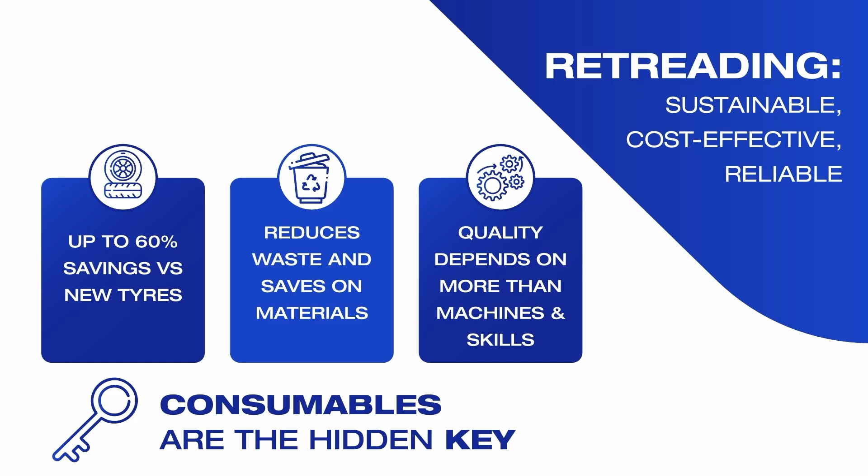The success of retreading doesn't only depend on machinery or skilled operators. It relies heavily on something often overlooked: the consumables. Consumables are the heart of the retreading process. They may seem like small everyday items in a factory, but in reality, they determine whether a retreaded tire will be safe, durable, and profitable, or whether it will fail prematurely.

These consumables include everything used from first inspection right through to final inspection. Each one has a specific function, from repairing damaged casings to ensuring perfect adhesion between old and new layers, to protecting the tire during curing. Without these consumables, the retreading process would be incomplete. More importantly, without quality consumables, the final product would not meet safety standards or customer expectations.

In the transport industry, where tires carry heavy loads over long distances, reliability is non-negotiable. That's why understanding the role of each consumable is vital. In the presentation, we'll explore the different consumables used in tire retreading, look at their specific roles in the process, and discuss why their quality and proper application is essential. By the end, you'll see that consumables are not just materials we use up. They are the building blocks of retreading success, ensuring that every kilometer driven on a retreaded tire is safe, efficient, and cost-effective.

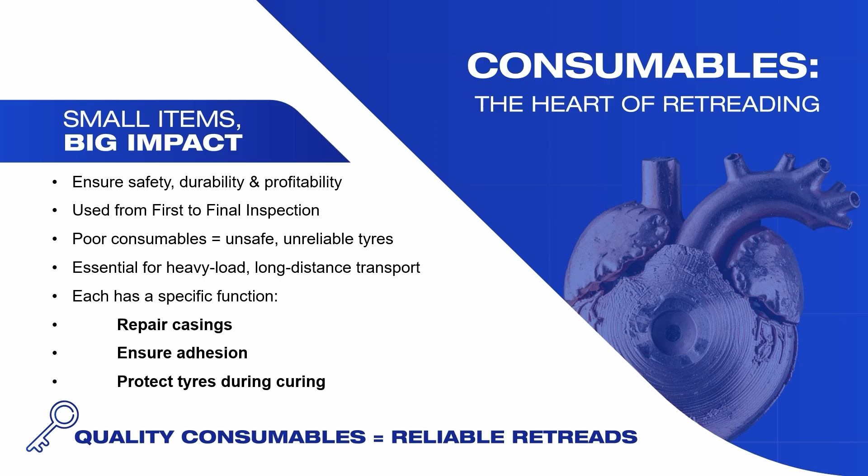What are the objectives of the consumables used in the tire retreading process? In the retreading process, consumables are the supporting materials used alongside the main rubber compounds to ensure the retread is durable, safe, and efficient. The objectives can be grouped as follows. Surface preparation: ensure the buffed casing is clean, rough, and free from contaminants. Examples: cleaning solutions, solvents, rasps, brushes. Bonding and adhesion: promote strong chemical and mechanical adhesion between the old casing and new tread rubber. Examples: cement, cushion gum, bonding gum, and adhesives.

Repair and reinforcement: restore damaged areas like injuries, nail holes, sidewall cuts, before applying the new tread. Examples: repair patches, patch cement. Sealing and protection: prevent air leaks and contamination during curing and after retread. Examples: envelope loop, wicking. Curing support: assist in uniform pressure, air removal, and correct heat distribution during vulcanization. Examples: envelopes, inner tubes, and curing tubes.

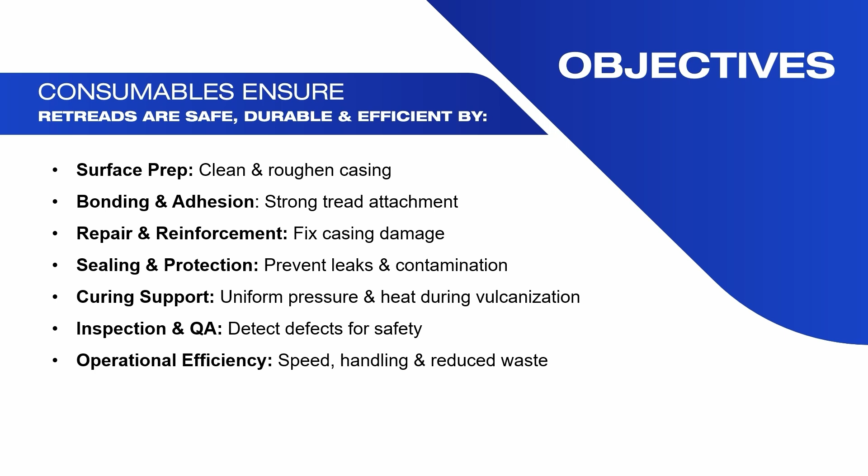Inspection and quality assurance: detect defects, separations, or trapped air to ensure safety of the finished tire. Examples: chalk, paints, sprays, and detector fluids. Operational efficiency: improve handling speed of production and reduce waste in the factory. Examples: lubricants, stitching tools, etc. In short, consumables in tire retreading exist to clean, repair, bond, seal, cure and protect the casing so that the retread performs like a new tire in safety and mileage.

Let's break down the consumables used in the different stages of tire retreading. Safety note: the operator must at all times wear protective clothing during each stage of the retreading process, available from Leadertread. Number 1: first inspection.

Tire probe: to probe at cuts, penetrations, and areas of localized damage. Pliers or pinchers: to remove penetrating objects such as nails, screws, bolts, sharp pieces of steel, etc. within the tread area. Also to remove existing loose repair patches or plugs.

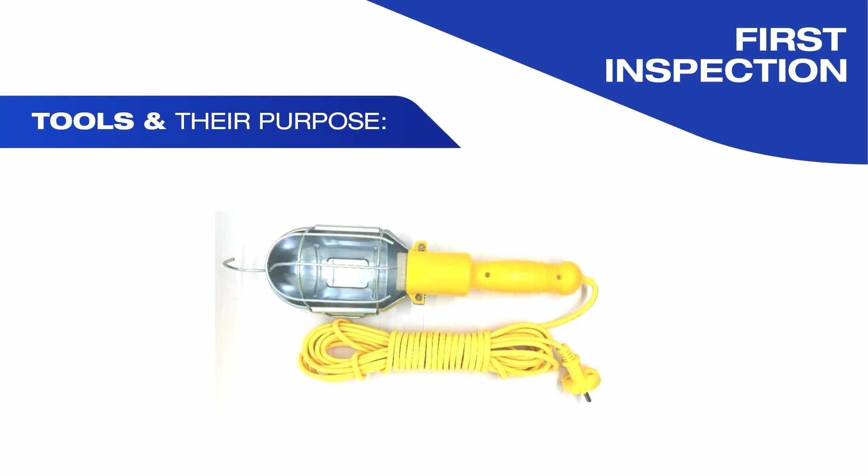Sharp knife: to cut away loose areas of damage or tread rubber to assist in damage assessment. Tape measure for injury measurement and repair assessment. Portable hand lamp to assist in the examination inside the casing or areas of shadow. Tire markers, marking the location and identification of injuries.

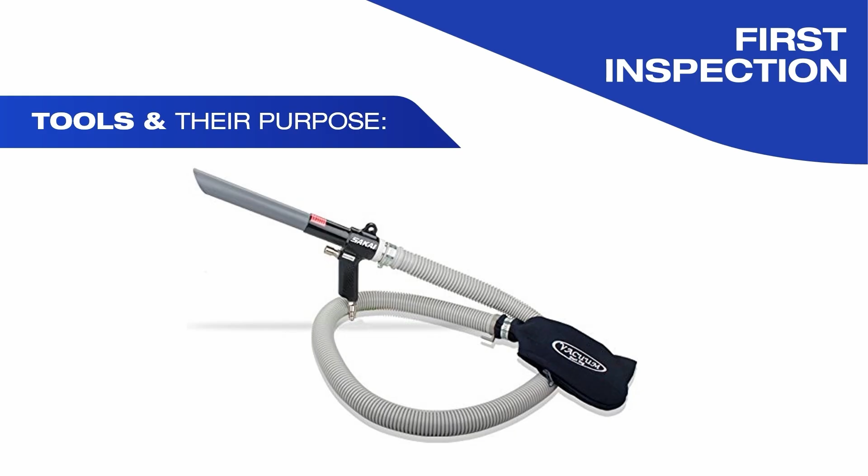Safety glasses for eye protection when removing penetrating objects, stones, glass, etc. Vacuum for the removal of debris from inside the casing. Scraper for the cleaning of the inner liner of the casing together with cleaning solution. Gloves and protective clothing to protect the operator while handling and sorting casings.

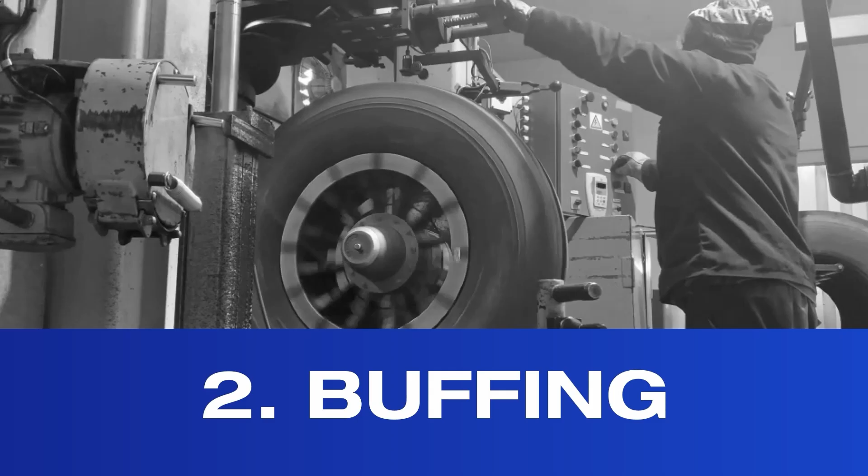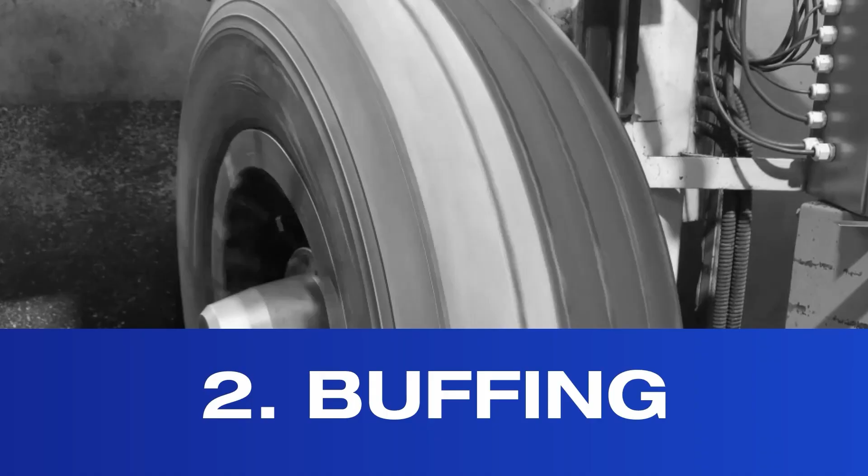Number 2: Buffing. Safety note: the operator must at all times wear safety glasses and ear protection whilst buffing. The primary purpose of the buffing operation is to remove the oxidized and the residual tread rubber from the original casing, and in doing so, to provide a suitable buffed profile and surface texture for the application of cushion gum and pre-cured tread prior to vulcanization.

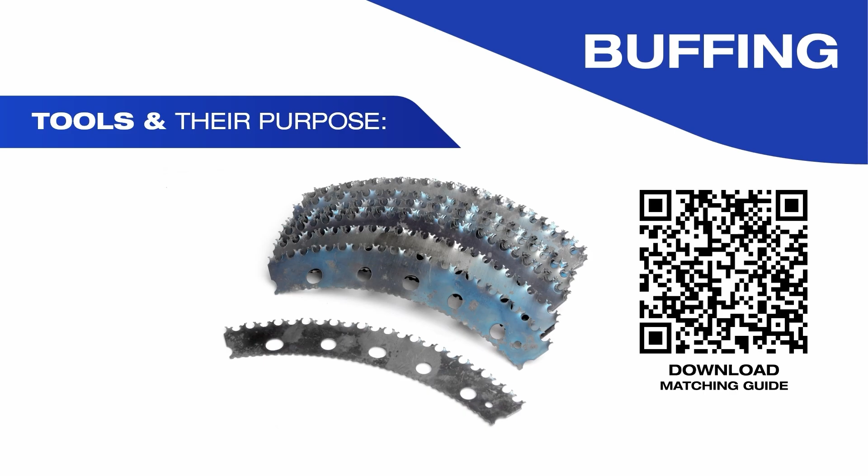Before commencing the buffing operation, the condition and sharpness of the rasp blades must be checked and verified in order to achieve optimum levels of buffed texture without scorching. Buffing blades: the primary purpose of the buffing blade in the rasp hub's operation is to remove the oxidized and residual tread rubber from the original casing, and in doing so to provide a suitable buffed profile and surface texture for the application of cushion gum and pre-cured tread prior to vulcanization.

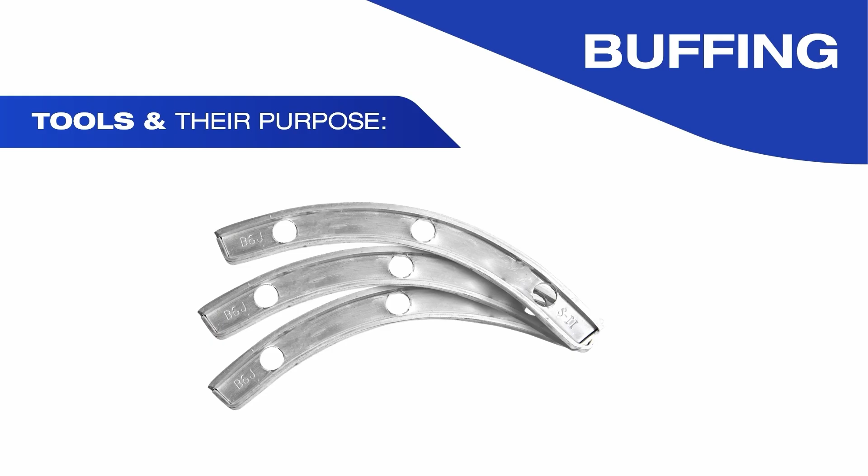Spacers: spacers are used in between the buffing blades in the rasp hub for spacing to get the required buffing texture and for air to flow through the rasp hub for cooling the blades. A file is used for sharpening of the buffing blades, to retain the required buffing texture. We will now show you a short video on how to optimize your buffing hub.

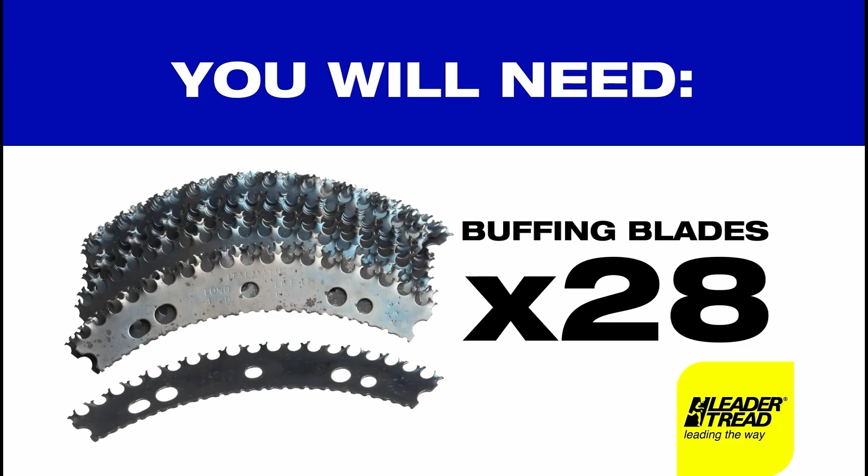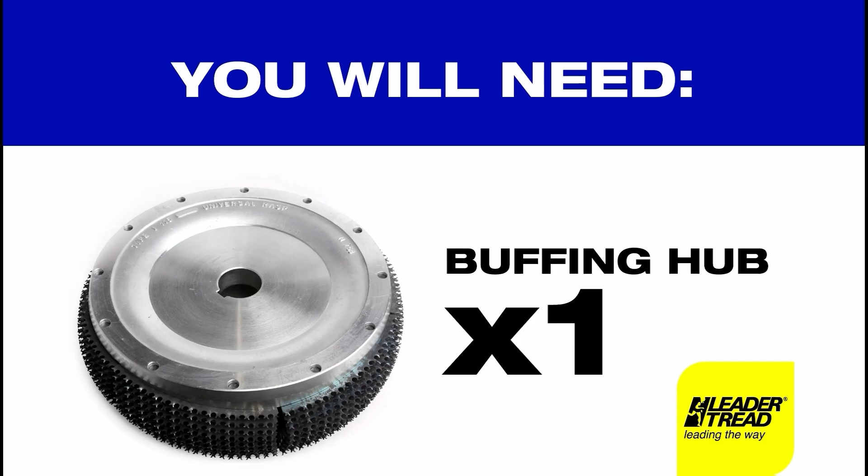Welcome to this step-by-step guide on packing a buffing hub with blades and spacers. This setup ensures optimal performance and efficiency. Let's get started. Begin by placing a blade first, then add a thick spacer. Continue alternating, a blade, then a thick spacer, until you have placed 5 thick spacers. Next, add 1 thin spacer. This completes the first section.

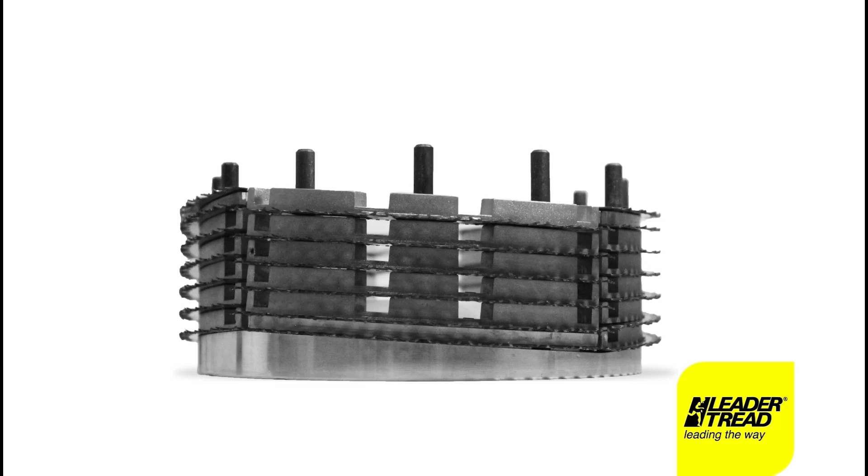Now place another blade, followed by the thin spacer. From here, continue the same alternating pattern: thick spacer, blade, thick spacer, blade, until all the blades are in place. Once everything is packed, double-check that the blades and spacers are evenly spaced. This arrangement ensures proper contact and the best buffing results. And that's it. By following these steps, you'll have a properly packed buffing hub ready for use.

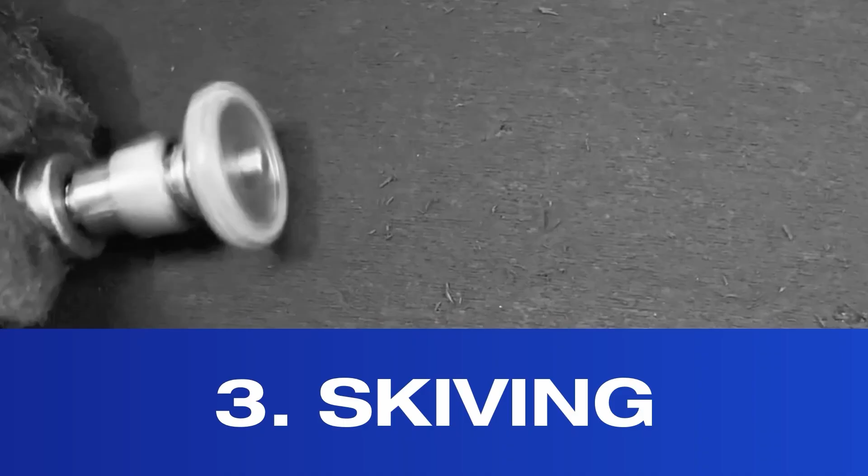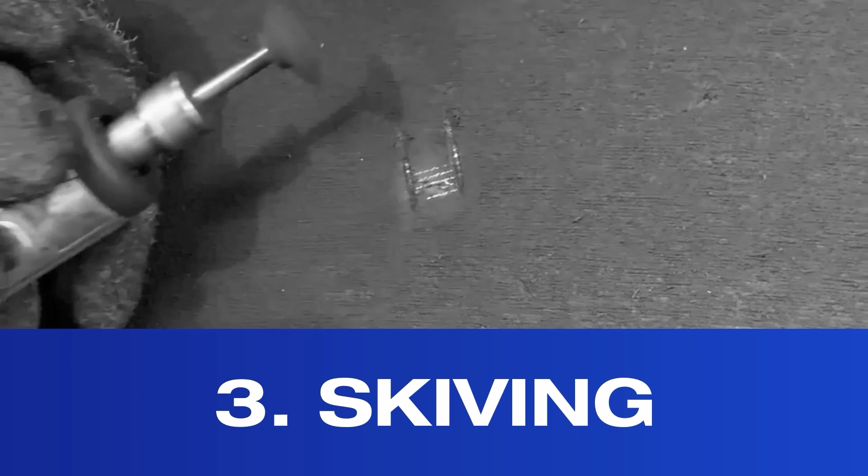Number 3: Skiving. Skiving is an essential and also the most time-consuming operation within the retreading process. The operation must be done correctly using proper techniques and suitable tools to ensure the full life of the retread. It should always be remembered that poorly processed skive-out repairs lower the quality of retreading and they are difficult to identify at final inspection.

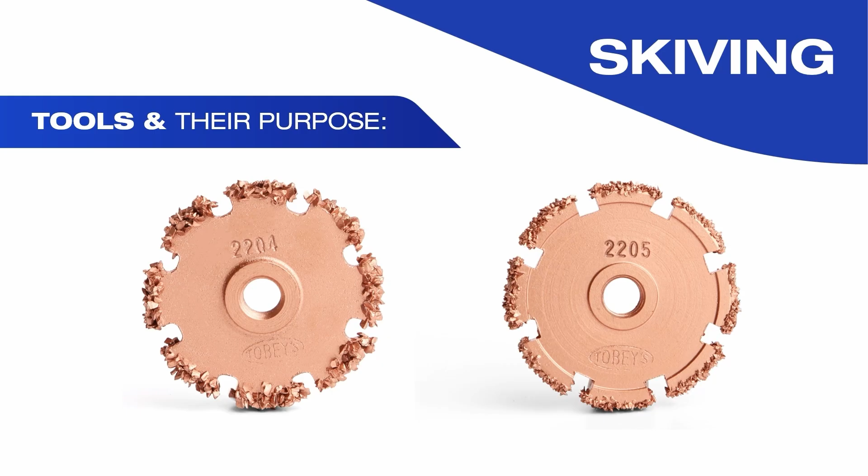Low-speed grinders used with rasps need to operate at low speeds, and high-speed grinders used with mounted stones need to operate at high speeds. Rasps: 16 grit tungsten carbide rasp for rough work, removing rubber and steel from the damaged area. 36 grit tungsten carbide rasp for fine work, removal of small amounts of rubber and to get a fine texture.

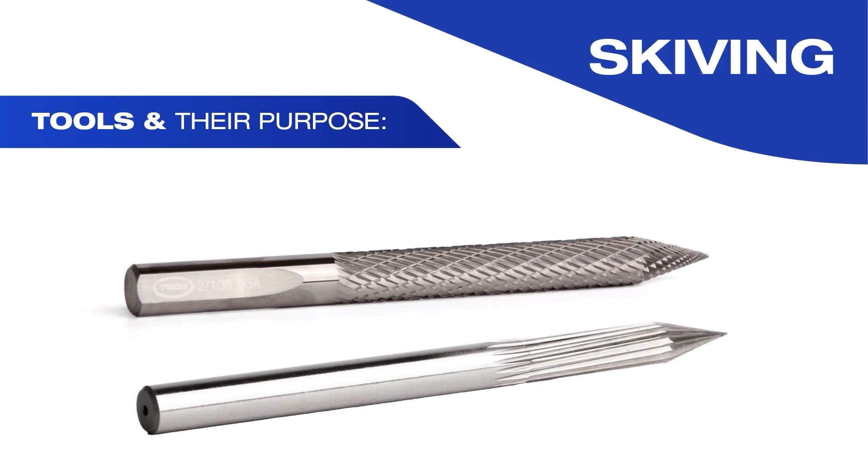Mounted stones for cutting frayed or loose steel cord ends and trimming. Rotary gouge, size 1 inch to 2 inch, for removal of large amounts of rubber. Carbide cutter, ideal for preparing an injury for patch installation. Pistol grip air drill is used with carbide cutters.

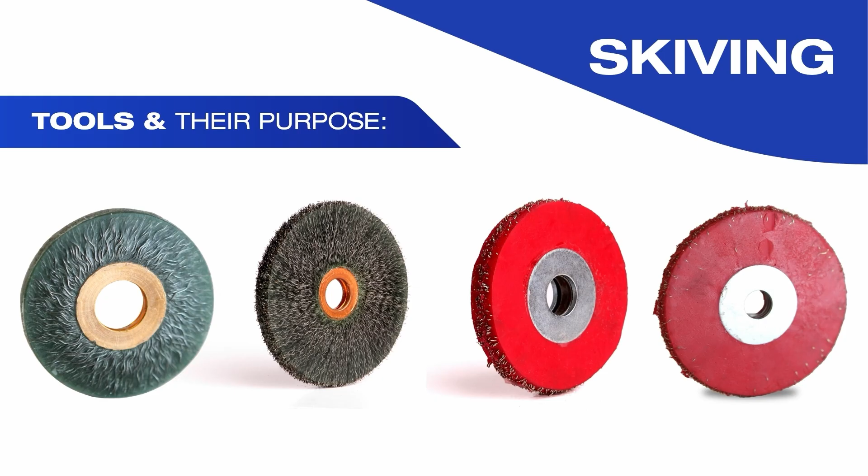Encapsulated wire brush for removal of burnt or scorched rubber, texturizing, exposing steel cords without damaging, and also for cleaning. Knife used for the cutting of loose rubber. Probe used to determine injury size and for checking remaining damages. Hand wire brush, cleaning the rubber dust from buffed or skived surfaces.

Number 4: Tire repairing. During a tire's service life, a large range of problems can affect the actual tire structure. Some of these may be due to small penetrations with larger objects or other tire-related problems. Many conditions manifest themselves due to normal wear and tear, a missed manufacturing production fault, or plain tire abuse. Repairing is a well-tried, professional and very successful method of permanent tire refurbishment. It is the correcting of defects so that the tire can complete its full service life.

In all cases, the area to be repaired will need to be cleaned and inspected in a well-lit area. Specialist tools will be used to remove all the injury, rust and damage from the tire before any final assessment can be made. The repair is completed by the vulcanization of high-quality repair materials which provide the strength, rubber finish and the tire resealing qualities.

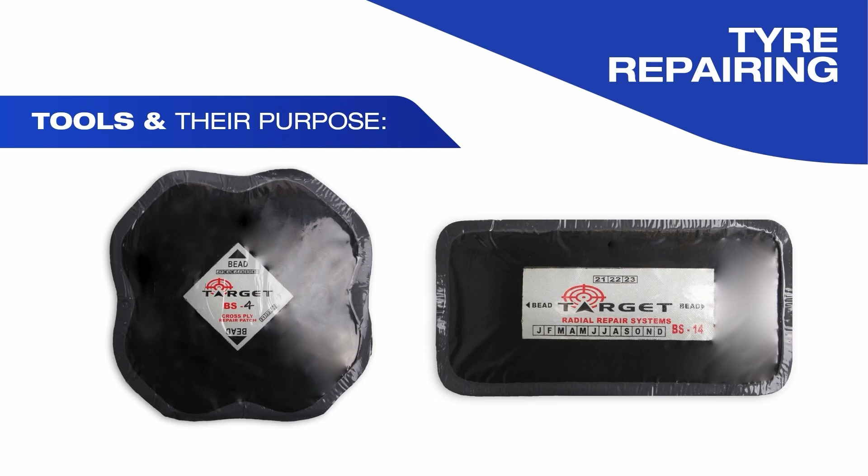Patches. Leader Tread supplies patches for damages ranging from nail holes to big injuries, from mushroom plugs to sectional cure patches. The two main types of patches Leader Tread supplies are: number one, a dual cure patch, which are patches made from advanced tire repair materials designed to fix injuries in both radial and bias tires.

Unlike conventional patches that require a specific curing method, dual cure patches are versatile. They can be applied using either chemical curing or heat and pressure. This flexibility makes them suitable for a wide range of repair situations, from small punctures to substantial injuries, ensuring strong adhesion, durability, and extended tire life.

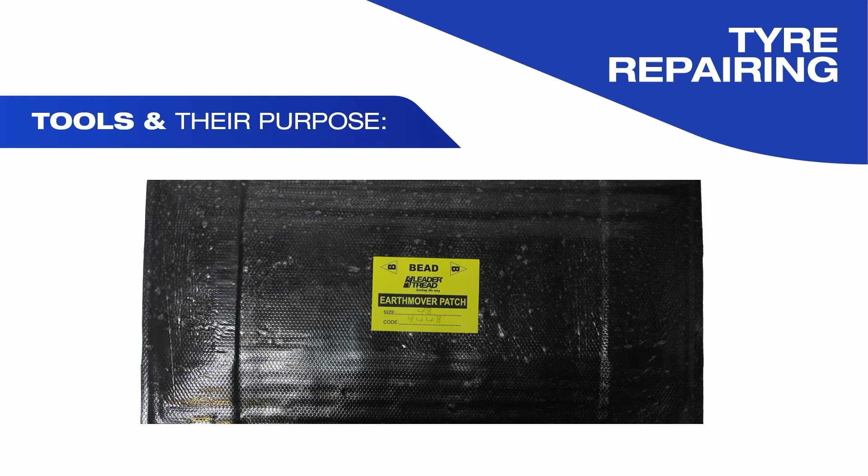Number 2. Sectional cure patches. Leader Tread sectional cure patches are built with specialized repair materials used to restore the strength and integrity of damaged areas in tire casings, particularly in truck, bus, and off-the-road tires. Unlike small puncture repairs, these patches are designed for larger injuries, such as cuts, tears, or impact breaks in the tread or shoulder or sidewall.

They are applied to the prepared injury area on the inside of the tire and then cured under heat and pressure, bonding the patch securely to the casing. Sectional cure patches restore structural strength, prevent further damage, and extend the service life of costly tires that would otherwise be scrapped.

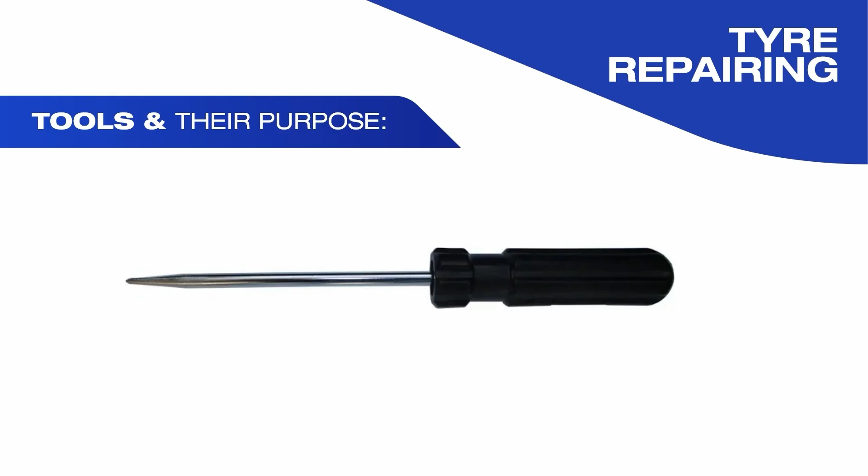Taper point knife, used to cut away loose pieces of rubber or old patches. Probe, used to identify the damage and determine angle, size, and depth of penetration. Vacuum for the removal of debris from inside the casing. Inner liner cleaner removes grease and other lubricants that contaminate the buffed surface during preparation.

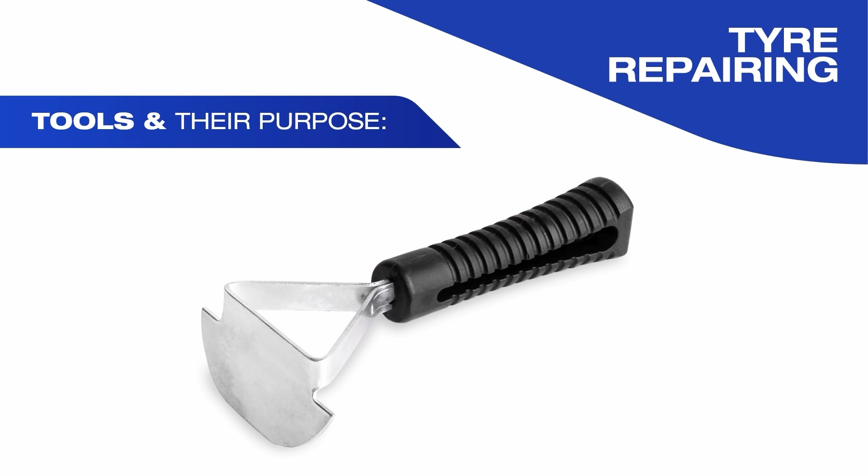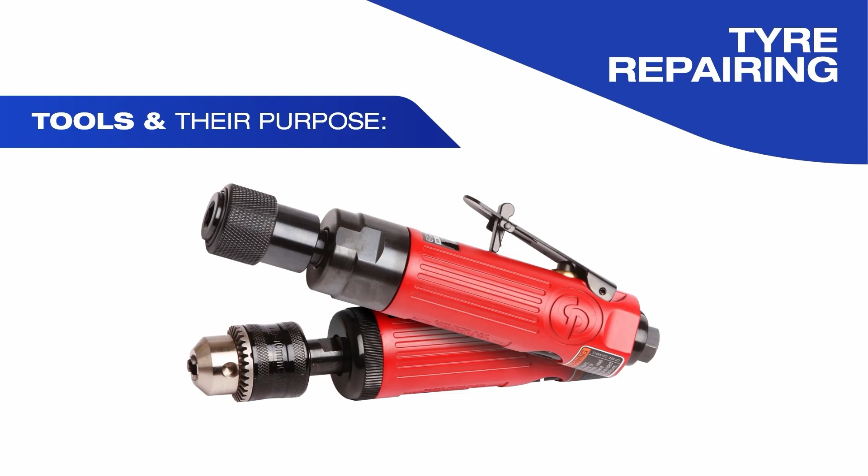Liner scraper. The inner liner scraper is used after using the inner liner cleaner to remove contaminated debris and to clean the inner liner. Low-speed air tool is used with rasps that operate at low speeds of 3000 to 4000 rpm. High-speed air tools are used with mounted stones operating at high speeds of 30,000 to 40,000 rpm.

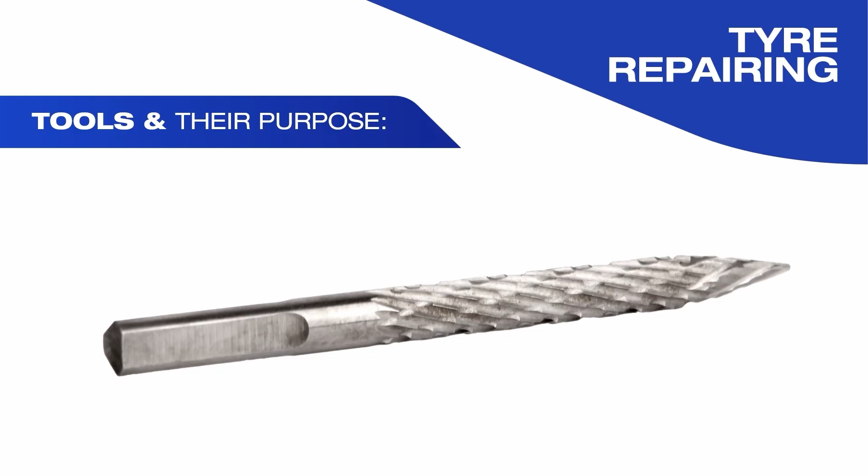Pistol grip air drill used with carbide burr. 6 mm carbide burr, lateral cutter for steel crown plies. Carbide long pencil 3 mm, lateral cutter for steel body plies. Mushroom stone is a round stone for skiving and crown buzz outs, cutting frayed or loose steel cord ends and trimming.

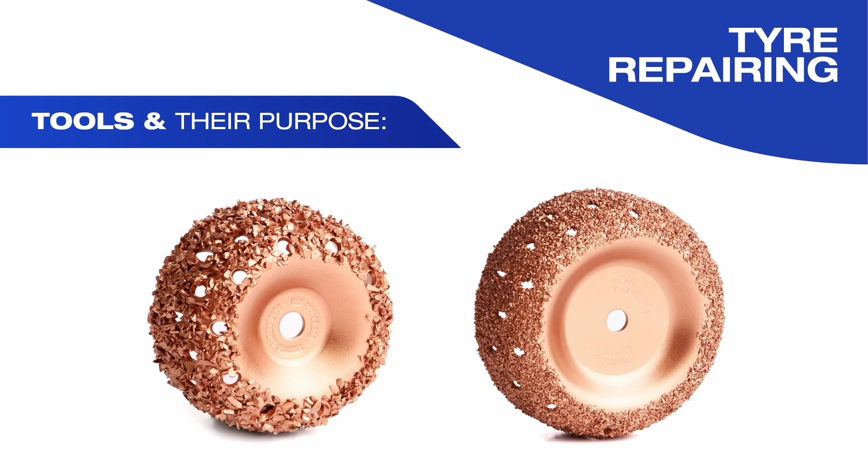Pencil stone, cut back exposed wires. Stitcher, stitch the patch from the center outwards to eliminate air trapped under the patch. Cup rasp, lightly buff the area outlined for the patch to achieve RMA3 texture. Rotary gougers, remove damaged rubber, old sectional cure or chemical cure patches.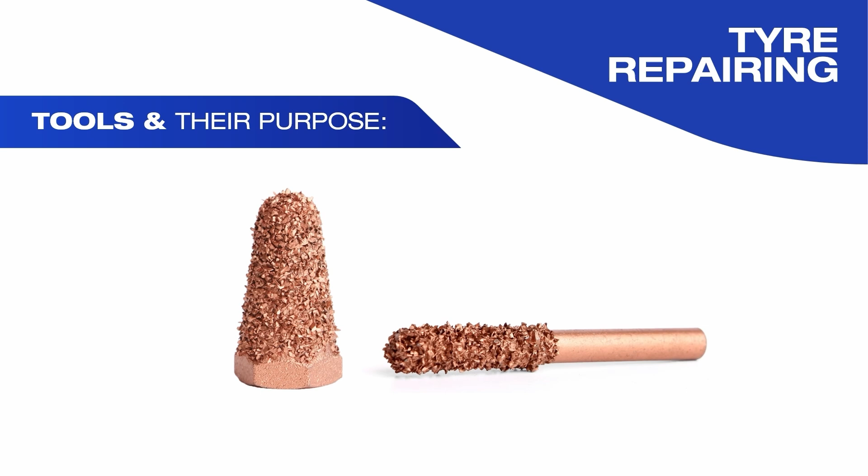Pencil and cone rasp, cut back and trim all loose, rusted steel plies. Flat face rasp, remove damaged rubber at 45 degrees angle to expose injury to the top belt. RMA3 texture to be achieved. Encapsulated wire brush, remove scorched rubber due to overheating with high-speed air tools and texturize.

Repair ruler and repair chart. Measure the length and width of the injury. Use repair chart to choose the correct size patch for the injury.

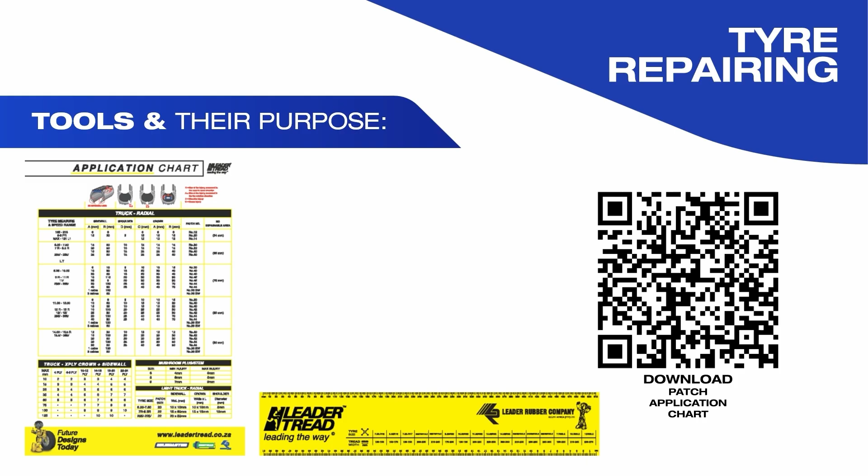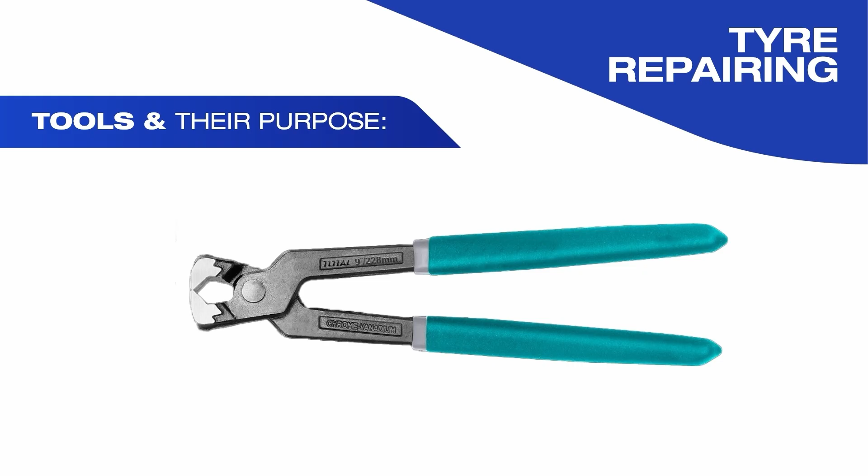Tire marker, for the marking of injury, injury type, size, and the outline of the patch before buffing of outline. Pliers or pinchers to remove penetrating objects such as nails, screws, bolts, sharp pieces of steel, etc. within the tread area. Also to remove existing loose repair patches or plugs. A stencil brush is used to apply chemical or vulcanizing cement.

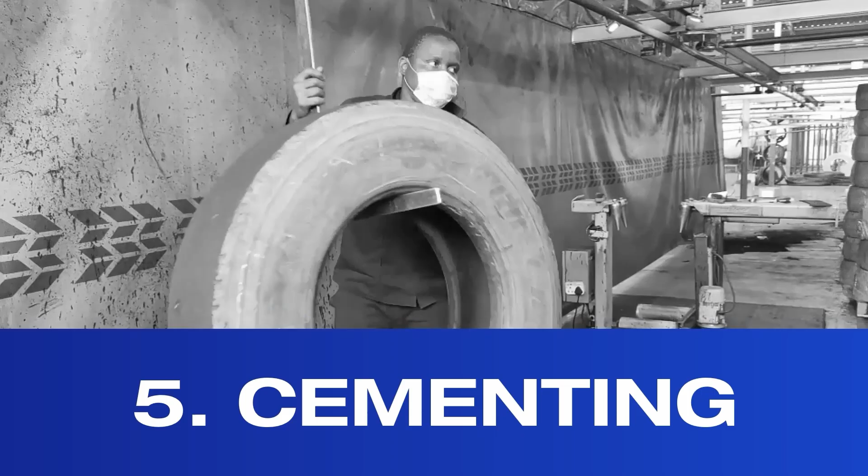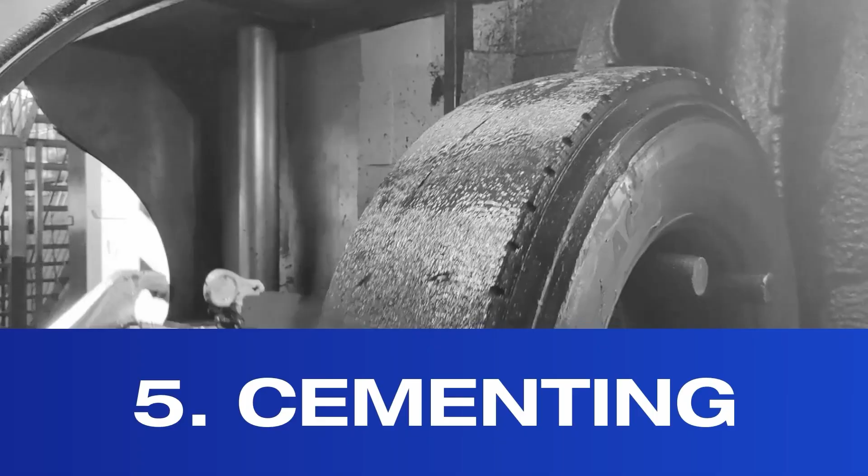Number 5. Cementing. The main objectives of cementing are to provide necessary tackiness for filling and cushion application, and protect buffed rubber surfaces and exposed steel cord ends from oxidation. Cement is a solution of unvulcanized rubber compound in a selected solvent. Cementing, by brushing or spraying, forms a thin layer of cement over the buffed surfaces.

After the evaporation or drying of solvent, rubber remains and forms a tacky thin cushion layer. This tacky rubber film acts as an adhesive for rubber applications to hold casing and rubber together until the curing operation. In fact, too much cement forms a thicker rubber film over the buffed surface and may have an opposite effect on bond strength after cure.

There are mainly two types of black vulcanizing cement. Number 1 is a brush type, concentrated with more unvulcanized rubber and less solvent. Number 2 is a spray type, which is diluted with more solvent and less unvulcanized rubber to make it easier to spray with a spray gun.

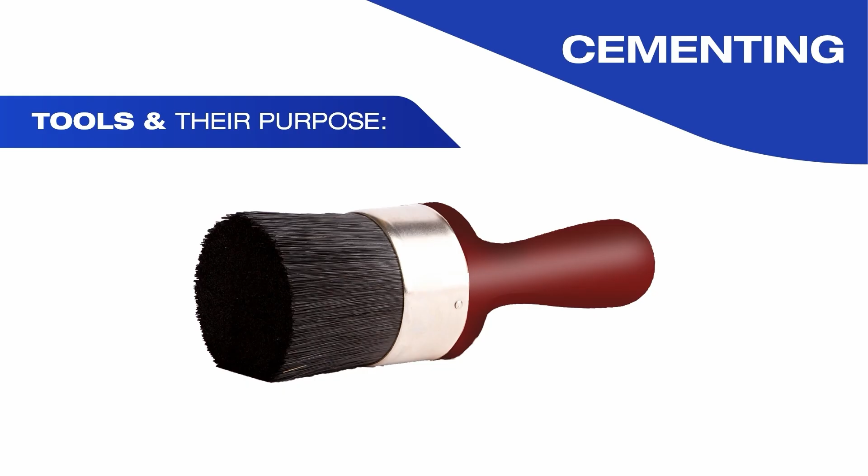A stencil brush is used to apply the brush type black vulcanizing cement. Available in 25 liters, the Tough Tack is a spray type black vulcanizing cement. The brush type patch cement comes in 5 liters.

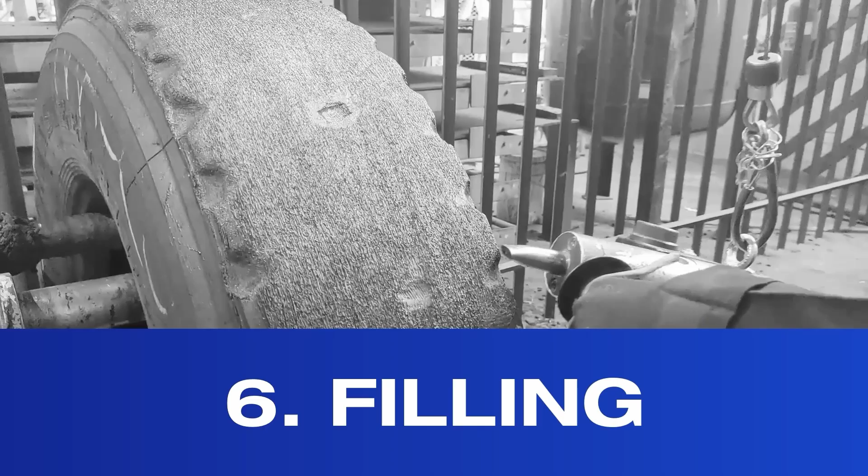Number 6. Filling. Fill all the skiving cavities around the tire, even to the surrounding surfaces, with a suitable bonding rubber. After skiving, where damaged rubber and cord are removed, skive out cavities and/or low spots are created around the tire. Before cushion gum and tread can be applied, all of these cavities and/or low spots must be filled with rubber to prevent the forming of air pockets under the tread.

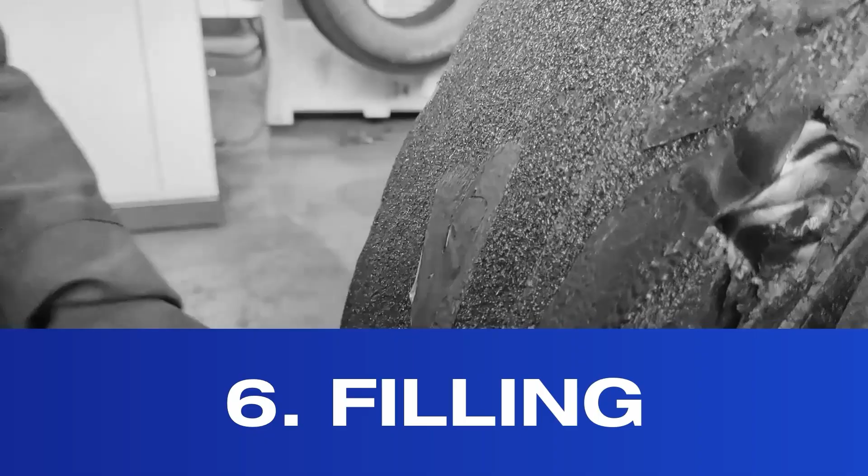Filling operation can be performed in two ways. Number 1, filling with the extruder gun. Using Leader Tread repair rope, the extruder gun should be set at best working temperature of 80 to 85 degrees. If temperature is set too cold, the rubber will not be soft enough. It will be difficult to apply and damage to the extruder. If the temperature is set too high, scorching will start. No bonding anymore. Number 2, automatic filling.

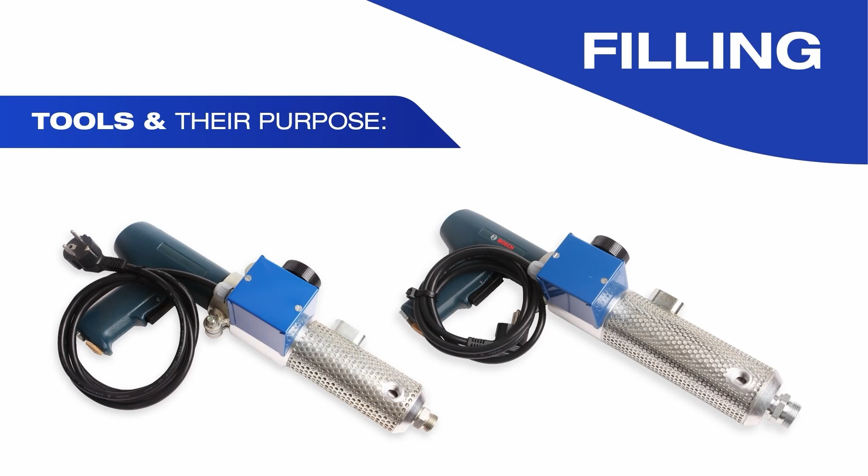Automatic filling extruder, for example an AZ extruder, while the tire is rotating, automatically applies hot extruded cushion gum as well as filling skive outs. Leader Tread suggests fill all the skives reaching the first belt and beyond with the extruder gun. Extruder gun. Heat and extrude repair rope for filling. Repair rope. Rubber compound used to fill all skiving cavities. Heated with an extruder gun.

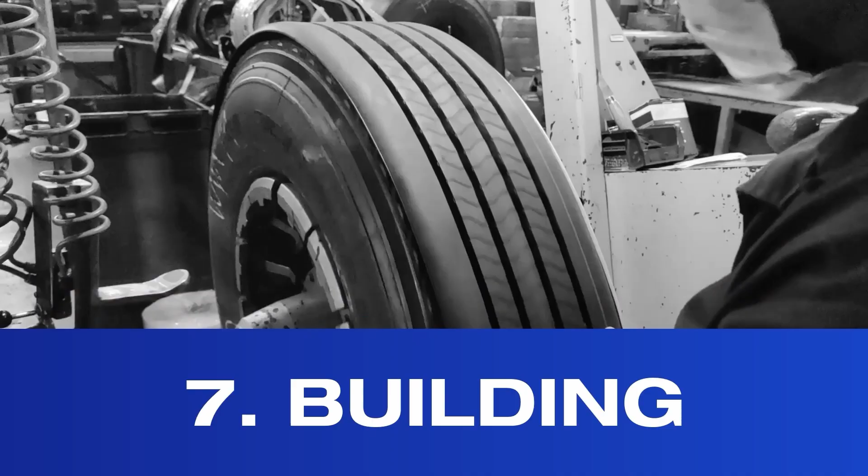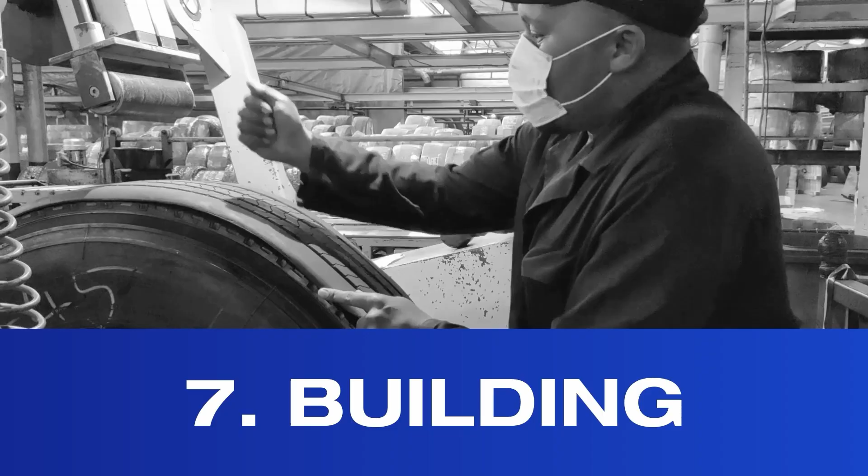Number 7. Building. The primary purpose of the building operation is to accurately apply the cushion gum and pre-cure tread products to the previously buffed and prepared casing. In essence, therefore, the building operation comprises a procedure for the assembly of the renewed components, for example cushion gum and pre-cure tread products, to the prepared casing prior to vulcanization in the autoclave.

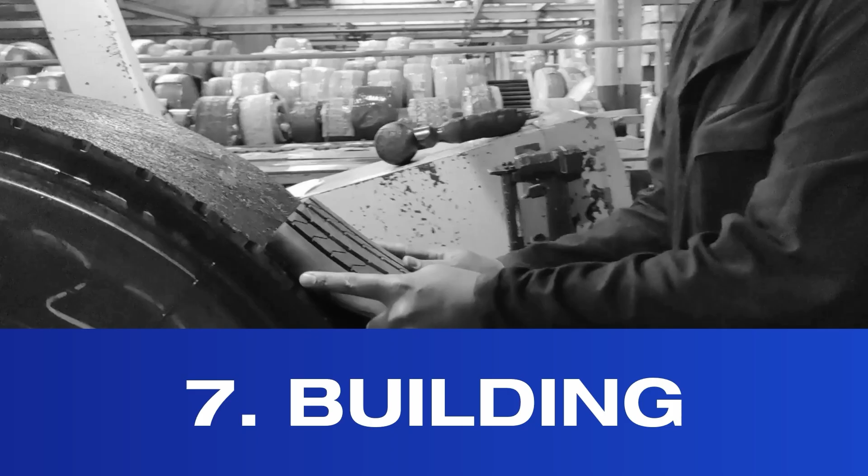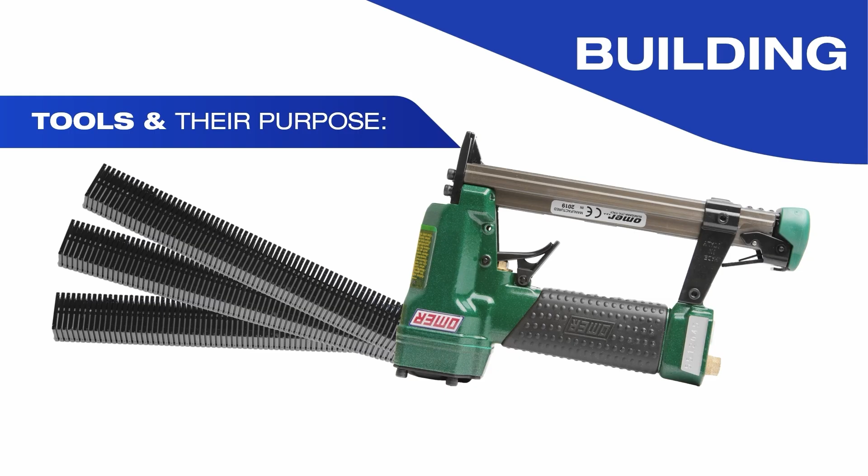A rubber mallet is used to stitch horizontally across the leading end of the tread only. Then from a distance of 30 centimeters back from the splice on the trailing end of the tread, stitch towards the splice, starting with the center rib and working outwards, stitching each rib in turn with a rubber mallet. A staple gun and staples are used to keep the pre-cured tread splice in place.

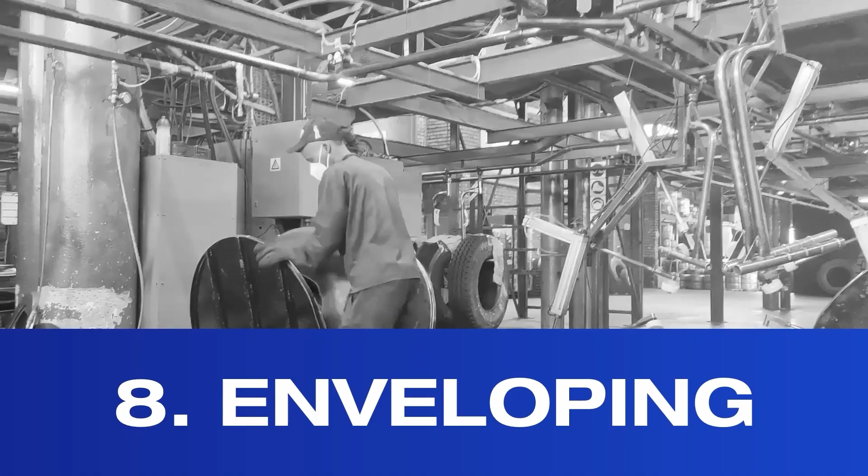Number 8. Enveloping. The purpose of the envelope assembly is to provide a sealed enclosure for the retreaded tire during the vulcanization process. The envelopes provide mechanical pressure and prevent the heat and pressure within the autoclave coming into direct contact with the bonding area. Envelope. Provide a sealed enclosure for the retreaded tire during the vulcanization process.

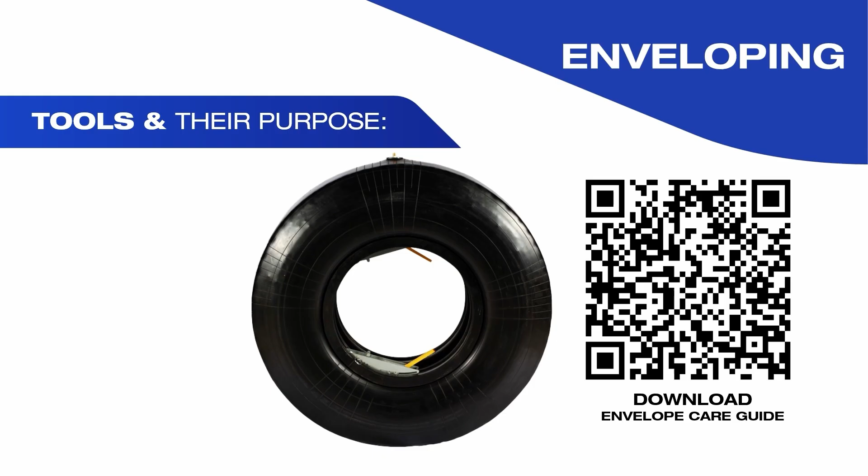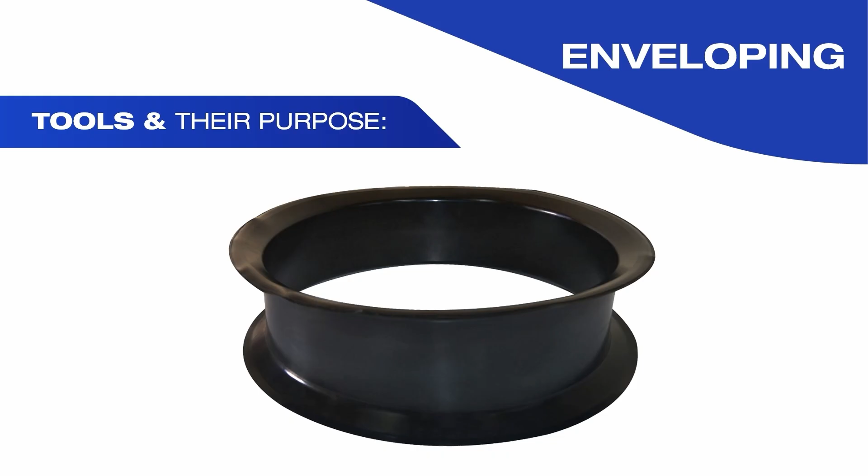Inner tube. Apply chamber pressure during curing. Tube. Apply chamber pressure during curing. Flap. Apply chamber pressure during curing. Wicking, which is available in rubber and cloth. The purpose of wicking is to provide a passage or path for air displacement and evacuation during the vacuuming process. Envelope lubricant is applied preferably once a day while the envelope is still hot to prevent sticking to tread rubber.

Number 9. Curing. The curing process applied to the retreading process is the culmination of all the effort and consumables used that has gone into the tire in the preceding operations. Chamber accessories available from Leader Tread are couplers and adapters.

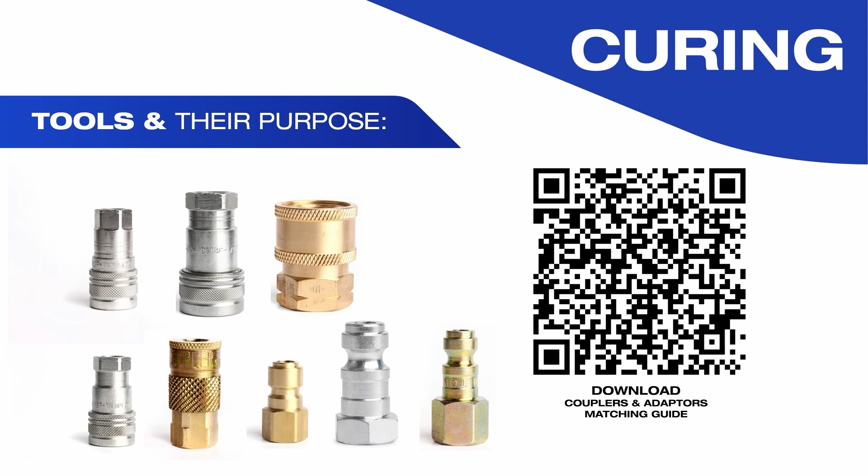Also available are Teflon hoses and chamber door seals.

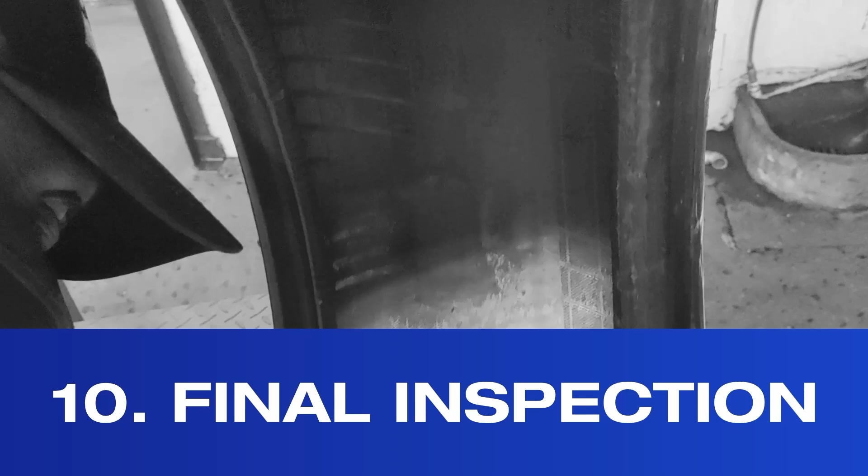Number 10. Final inspection. Final inspection is an operation to check the quality and integrity of the finished product following the completion of the retreading process. The primary purpose of the final inspection operation is to determine whether or not the finished product meets the required specifications in terms of quality, appearance, and the needs of the customer.

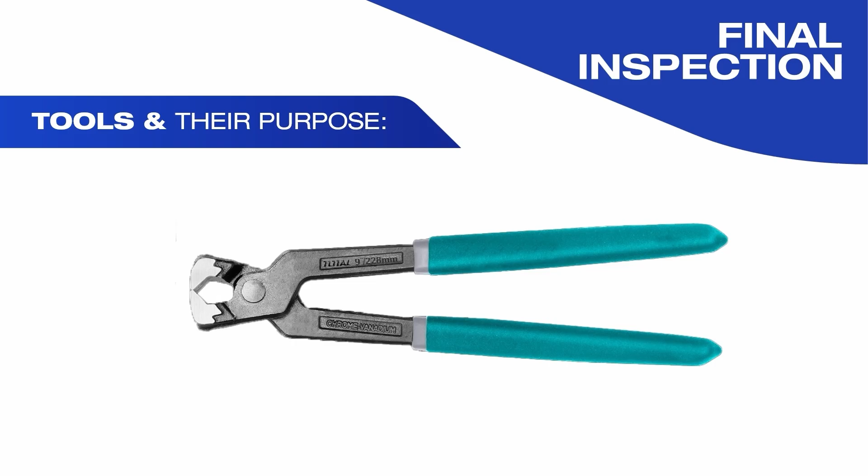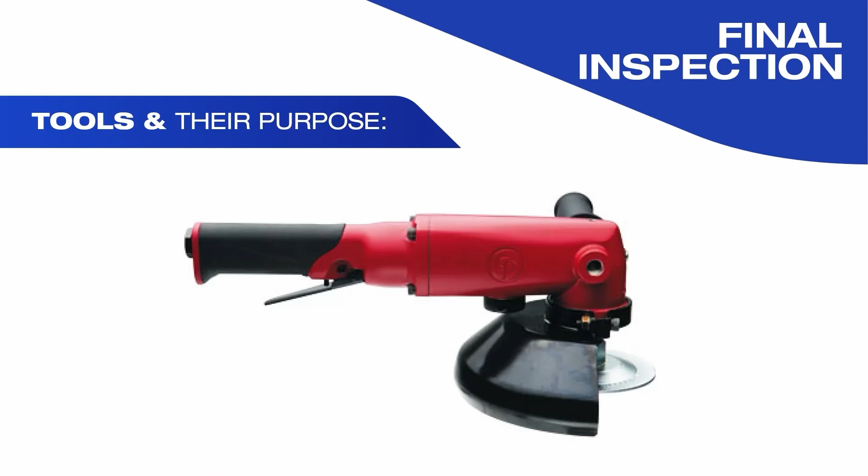Tools used at final inspection: tire probe, pliers or pinchers, tire marker, portable fluorescent hand lamp, air angle grinder used with a sidewall finish disc. The sidewall finishing rasp disc is used for final trimming on the sidewall and shoulder area before painting.

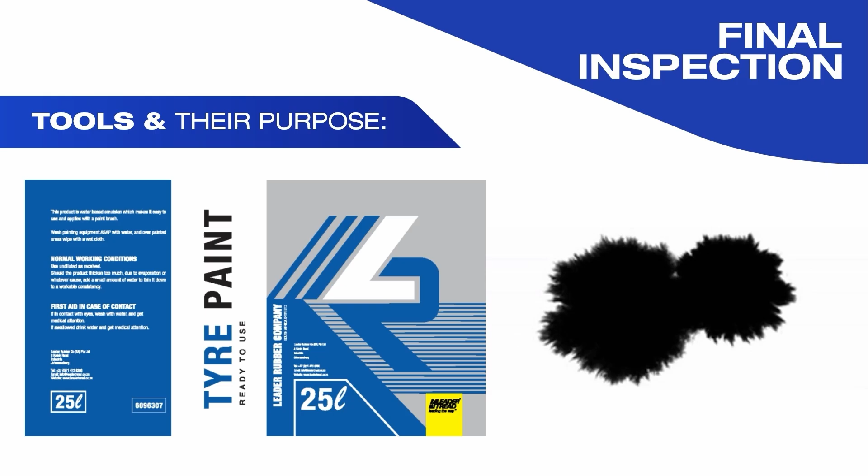Tire paint is applied to the sidewall of the tire to improve the cosmetic appearance of the finished product following the completion of the retreading process. That concludes the presentation. Are there any questions?